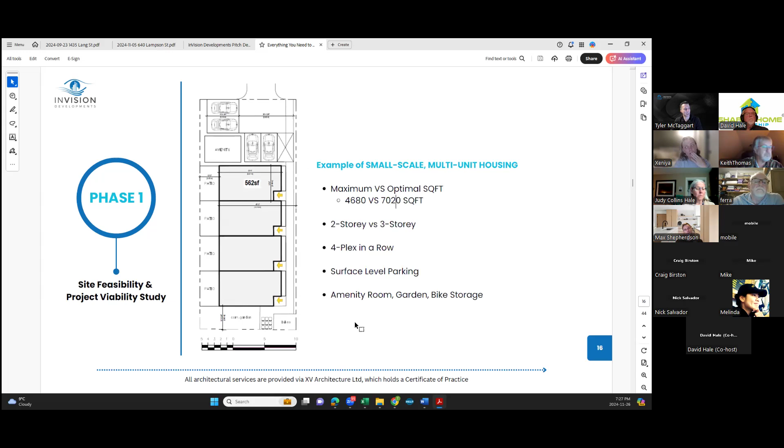So I'm going to go down here. The next phase, after we figure out what to put on a piece of land, is we can go in—this is an example of what can fit on a 6,100 square foot lot, called a schematic. Right here we have the ground floor. You enter into these units, there's a little covered area where you enter, a flight of stairs up, a bathroom, living room, dining, kitchen, and a bedroom.

All of the units are the same, except these ones have more exterior windows as end units. All have patio access onto small backyards. Entering and going up the stairs, you arrive at the top to a second bathroom and a master bedroom with a walk-in closet and a 3rd bathroom, and then another bedroom here. So in this case, we've got 3 large bedrooms and 3 baths that you can fit on a single lot.

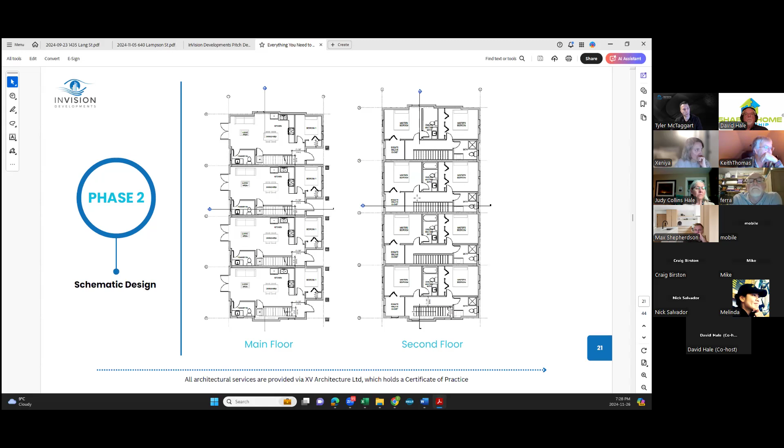So you can have this layout repeated—3 bedrooms, 3 bedrooms, 3 bedrooms, 3 bedrooms—12 bedrooms fit, and 12 bathrooms, on a single lot.

In terms of phase 3, there's quite a bit of work that we help with, consulting with all of the other professionals to make sure that your project comes together properly. This is some of the work that we do, and this is an example of what the renderings would look like for that type of project.

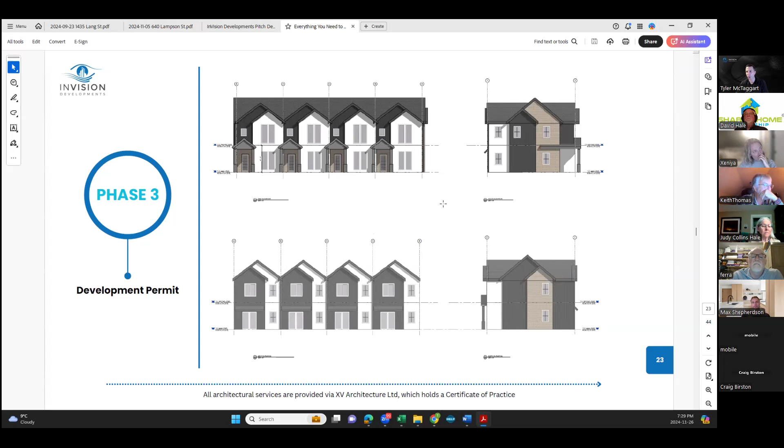So if you have just a fairly basic lot, you can fit 4 units. That's what we've got—an outside rendering of this project for now. We can work with all types of different designs. Xenia's got fantastic taste, so she just needs to know a little bit of your vision to put that together. But this can fit on pretty much any standard lot in most municipalities.

Something we do when we go through this is just an example of the type of detail we go into when we cost estimate these projects. We break them down into all the general conditions - things like staff, construction management, superintendents, foremen, print drawings, even Zoom boom, engineering and surveys, all the costs, all the site work, demolition, concrete. This would be considered a Class D budget that we put together. We want to make sure we understand what the cost is when we put together these feasibility studies. That's the level of detail we put into these hard cost budgets.

Good spot for me to pause and see if there's any questions on missing middle before I go into municipalities specifically. Anyone have anything to discuss?

Just to reiterate, missing middle is just for Victoria, and then the other program is for the rest of British Columbia. Is there a specific zoning that this is for, or is it for all zoning?

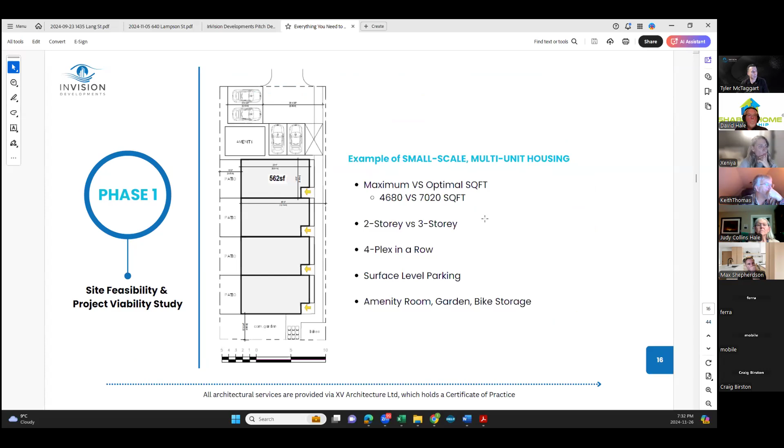There was one request to look at a soft cost slide again, which I don't know if I have handy - let me just see. This was not soft cost, this was our construction estimate. So not a soft cost, but this just shows general requirements aren't considered soft costs. General requirements are all of the costs of all the things needed on site to build the project, outside of the different divisions of construction.

That's just a little estimate of all the things that go in there. We do carry some things like extra contingency in here. We've got course of construction insurance, which is technically a soft cost.

This here is just an example of the type of report we put together when we review a project to see what's viable - in this case, a sample of a cover sheet. This does show some soft costs. This is a proforma we put together to look at one example and everything we include. We look at it from a rental basis - what units would rent for, what they would sell for - and we include energy modeling, code consultants, mechanical.

This whole section here is the listing of what we'd refer to as soft costs. Different municipalities are going to have different municipal fees in here, but normally on a project, before it was about 15% of each project made up of soft costs of the total project costs. Now it's closer to 20. In this budget, it's a total budget including land of 2.8, with 700,000 being land, so 2.1, and you have about 400 grand as soft costs. That's around 22% soft costs on a missing middle project.

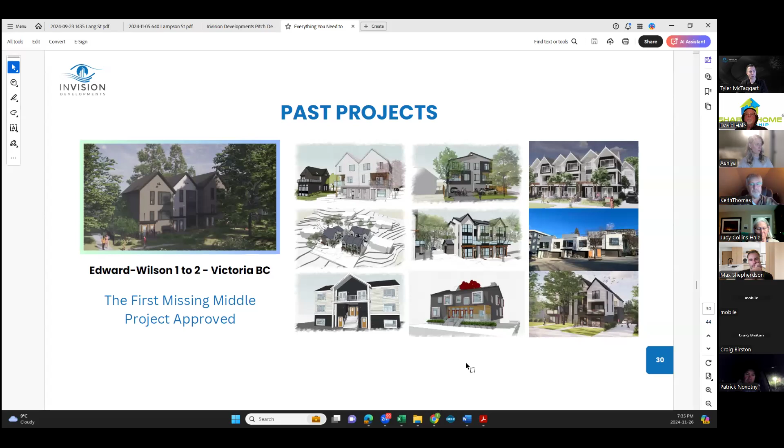Now we're going to move into Esquimalt and Saanich, where Xenia is going to help us navigate any questions specific to Esquimalt. We've done some extra prep to talk about Esquimalt and some of the pros and cons of developing there right now, so I'm going to go down to a deeper dive - small scale multi-unit housing in Esquimalt.

Xenia, do you want me to just do a quick walkthrough, and then maybe be open to taking some questions after? Yeah, sure.

So in Esquimalt, this drawing here came off the provincial BC Ministry of Housing's request for information, where they had someone come in to design standardized housing that fits on all lots. There's a guide that shows these designs, and if you want to dig into that, David and myself can email it out to the group. These aren't Invision's designs, but examples that were sent into the BC Ministry of Housing.

So Esquimalt has done the adoption of small scale multi-unit housing, with a new definition of small scale multi-family housing. They permit up to 3 dwellings on parcels of 280 square metres or less, and up to 4 dwellings on parcels between 280 meters and 1 acre, in zones that would otherwise permit single family and 2 family homes. So even though your lot's large, right now Esquimalt is saying they don't want to go higher than 4 units per existing lot, because they're trying to keep people away from rezoning and more comprehensive development processes.

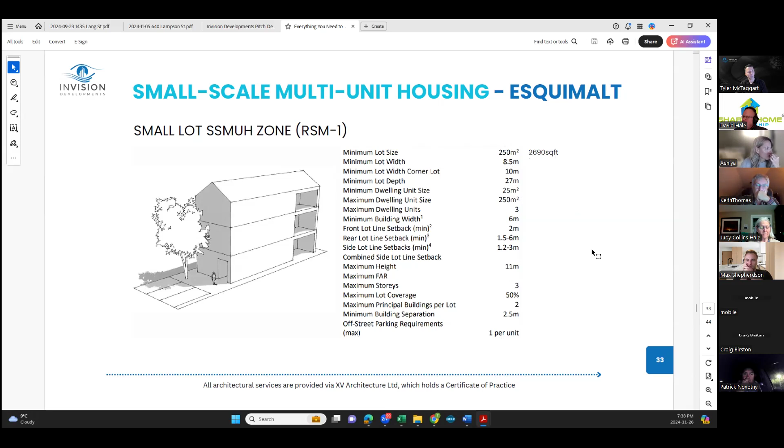That's in this first phase. The next phase needs a wider frontage at 10 meters and a minimum lot size of 3,000 square feet to fit up to 4 units. I'll let Xenia give us a bit more of an update later.

Right now, Esquimalt is having some interesting challenges with approving parking. In areas where you're building 2 duplexes, they're allowing 1 parking stall per unit. But if you build these together as 1 fourplex designation, the current bylaws ask for more parking, closer to 2 to 1. This is just a residual from a very old parking bylaw, where for whatever reason they had a larger parking requirement for townhomes than for duplexes. So right now, if you were to build 4 townhomes like the project shown a few slides back, you'd need 2 parking stalls per unit, which basically will not fit.

This is an unintended consequence. They're in the final stages of approving their new parking bylaw, where it will be 0.5 stalls per unit, so 4 units would require 2 parking stalls. But essentially until that is done, hopefully in December or January, duplexes are what we're seeing developed in Esquimalt, as 2 separated units.

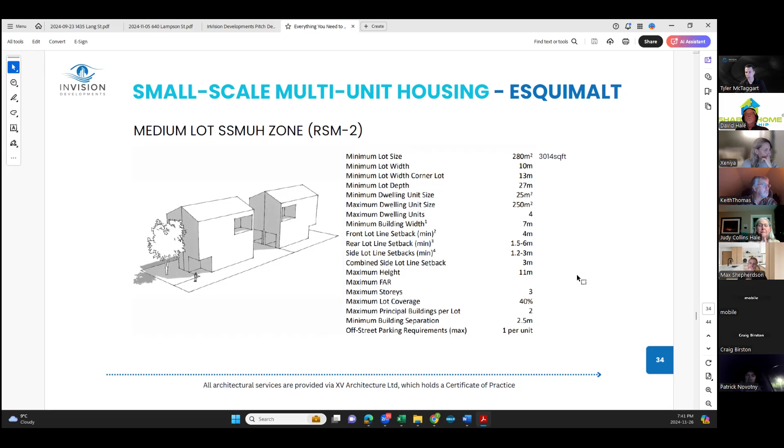And what we've heard is that Esquimalt is looking to not restrict development to just duplexes, but that hasn't been approved yet. This is an example of a transit lot. Xenia, you were part of a transit lot rezoning recently, weren't you, on one of your projects?

With I was close to it, but no, it wasn't by right or anything. So these are just some examples where they've allowed 6 units in a transit area. So minimum lot square footage.

And just to interrupt, Tyler, this is also not yet approved, this is just in the making. So as of right now for Esquimalt, it's up to 4 maximum. They are shooting for this, they're hoping to get to that, but this will come out only once their OCP is updated.

Awesome, so another great reason to come in and chat with you. So if you have a piece of land and want to get to market and get your units or your home built faster, maybe going with the existing grandfathered rules or getting some guidance on the likelihood of getting 6 units approved if it makes the most sense. Something to note, when you go up to 6 units, you're going to need commercial financing to finance it. And if you're tearing down your home and building 4, subject to qualification, of course, you can still get residential financing to build 4 units, 1 for yourself to live in with 3 rentals.

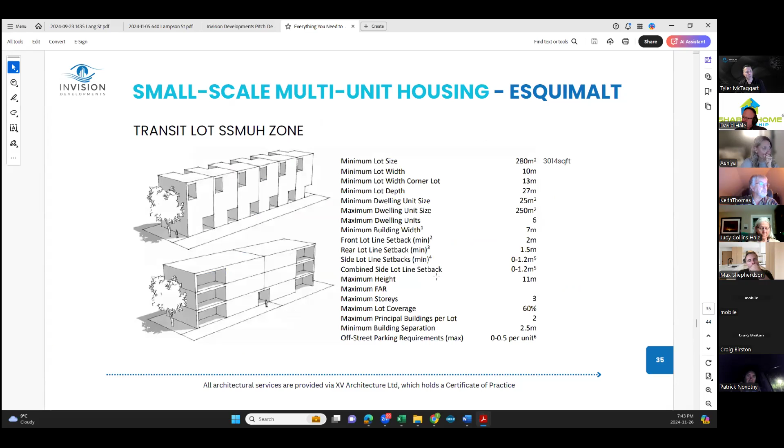We have put together some information on Saanich as well, but rather than go in and dive into another municipality and their SSMUH rules and designations, for today we're going to stick with Esquimalt and see if there are any questions. I noticed there's quite a few realtors in here. Any questions you have about developing in Esquimalt or Victoria?

My question, Tyler, would be, if I was talking to a client and they wanted to have the most profitable development scenario, would that be Victoria?

It all depends. Victoria allows the most density, and density normally means more profit because you're fitting more units. And the smaller a unit, the higher dollars per square foot it normally sells for. But it really depends on the lot itself. So I wouldn't pick the city, I would pick the lot. Some lots have different issues, restricted covenants, prohibitive trees, protected trees, prohibitive landscaping, rock outcrops, things like that, that might make it more complicated. Slopes.

Now, the other thing is the bigger the lot isn't always the better. So some clients have come to us with really large lots, and what we're finding is they're almost good candidates for subdivision, but not all municipalities want to look at taking one larger lot. We had someone with around a 15,000 square foot lot, and that particular municipality was like, we don't really want to look at subdividing that into 2 7,500 square foot units so you can put 4 units on each of the lots.

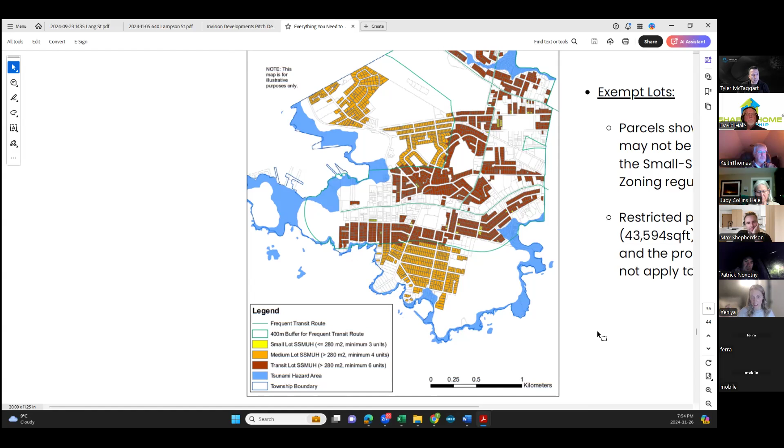This blue color here depicts the tsunami zone. There are some full neighborhoods going down, and sometimes it just touches your lot by a hair, where most of your lot is perfectly developable, but they've painted it as unavailable for development.

So I think some of these are still going to be a very good case, but it's a rezoning now, no longer a delegated development permit, which is what they've done in Vancouver as well with some restricted covenants or restricted building schemes. It just gave them a way to say no without being swept up, which protects some of these neighborhoods.

Right, great question, Max. Cool, thanks for the insight there, Xenia, an insider with all the scoop.

This is fantastic. I've got a question given that we have some realtors on the call tonight. I understand you have a program, Invision Developments, where you'll come to a property to do an assessment for about $2,000, and it's very in-depth. I know you've done one for me, and my client is over the moon about what they got for that value, and it's something that can be used to promote the property and show its highest and best use and value for the lot. Maybe you can touch on that, Tyler.

Yeah, in the report I showed a bit of what one of those reports looked like. The goal with the $2,000 review is, if someone's listing a home with development potential, especially a more complicated lot or one with high development potential, to really pinpoint what that residual land value would be. It's hard to understand what a developer is willing to pay, and if there's a risk around rezoning or subdivision, we can show what those costs are to help pick the right price if you're listing a home.